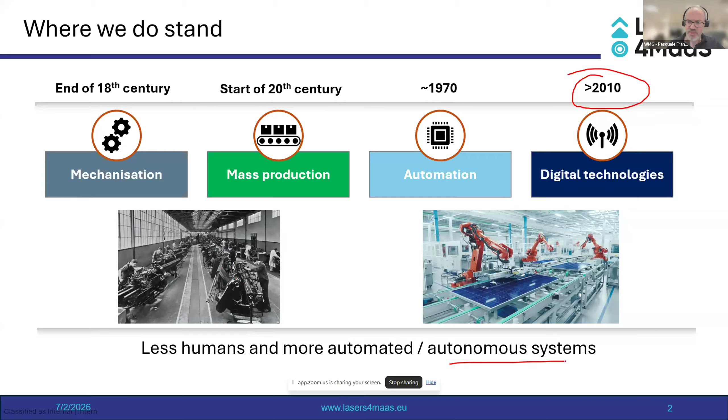Then in 2010 we had a new transition into Industry 4, or the Fourth Industrial Revolution, where we introduced digital technologies within the production systems, together with smart sensors, IoT devices, and AI, with machine learning and other AI technologies. So the trend is really going from manual operations to more automated or even autonomous systems. This is happening these days.

Then we had the idea of introducing a new approach that we call manufacturing as a service. So the question we have is: is manufacturing as a service the next frontier within production systems? We don't know, we will see in the next few years. But our definition of manufacturing as a service is basically to produce on demand customized products with high quality, flexibility, and short lead time. So we have all the main elements: time, quality, cost, with customization, and on demand.

On demand is what's been happening already for a few years. End users want not only one product but customized products depending on specific requirements and expectations. So we want to bring all those elements under the same roof as manufacturing as a service.

Now, to put this in context, we are working within the high-value laser welding industry. So all the technologies we are developing are related to the laser welding industry. Some of the technologies can be exploited outside of the laser welding industry because they are more horizontal, but specifically within Lasers4MaaS, we are focusing on the laser welding industry.

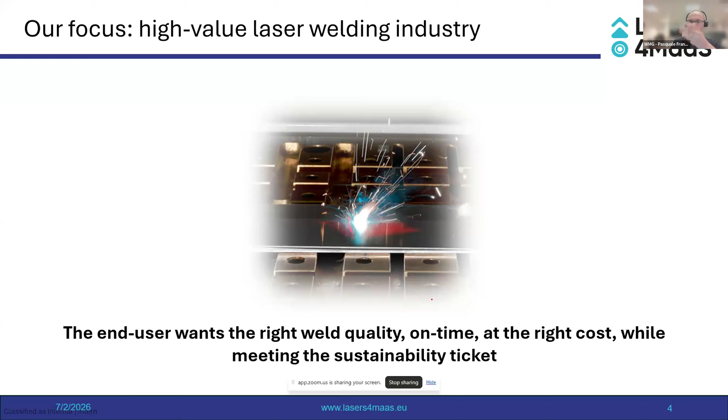Why is that? Because again, the end user wants to get the right quality on time at the right or reasonable cost, and on top of it, we want to meet the sustainability target.

So the current challenges with any laser material processing technology is probably around the cost. Usually they are high capex intense, so there is an acceptance challenge. Controllability - laser technologies are in general not so easy to control because there are many parameters that must be controlled.

Reconfigurability - it's not only about changing power and speed, it's also about the tooling, automation, jigging, welding sequence, and a few other elements of flexibility. And certification - certification is usually very well underplayed, so people are ignoring certification, especially in research environments. But these days, certification is becoming even more crucial.

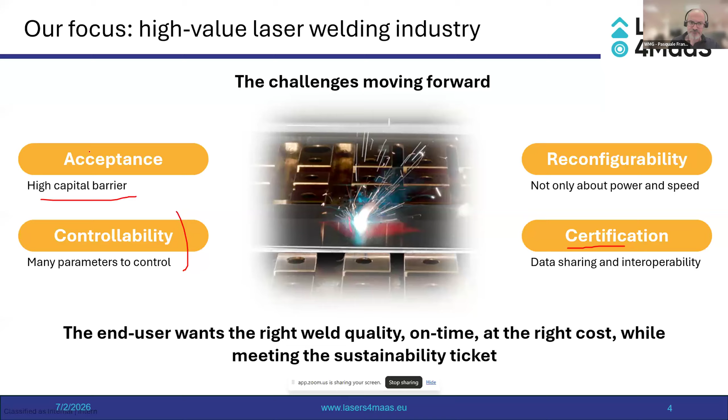Starting from data sharing and interoperability - so those are the four macro grand challenges, and those are exactly the challenges we are trying to address in the project.

So all in all, this is how we are developing the project. We are bridging, let's say, the left-hand side, which is like the classical way of developing laser technologies today - laser production as a tool. So we go through laser to material interaction, laser sources, optics, welding heads, all the metallurgy of the weld, optimization, sensors, and process control. This is like the typical loop we do every day when we develop a new process.

And we want to bridge this laser as a tool with the laser as a service. So we're bringing other ingredients, and we find the synergy between those additional elements. Those elements are about reconfigurability, digital platform, digital services, circularity, sustainability, interoperability, and on top of anything else is the AI-based decision support, which Kim will present just after my introduction slide.

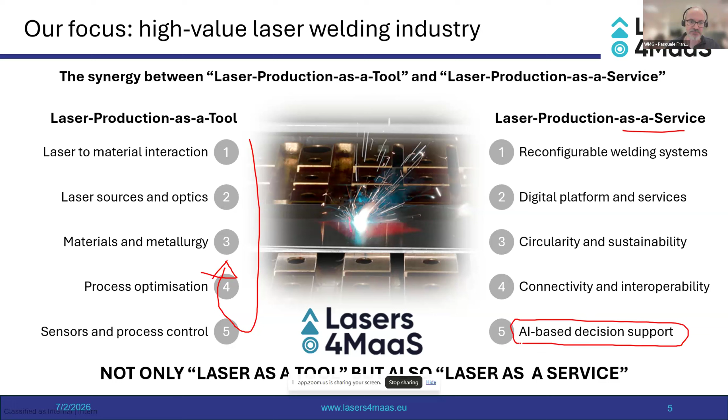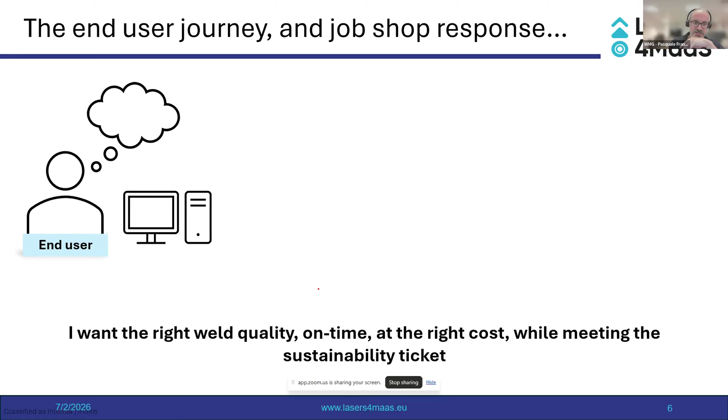So where do we stand with an end user perspective? If you are an end user and you want to use the technology, the first question is, okay, to me is about quality, time, and cost while achieving my sustainability targets. Okay, so we go to the marketplace.

There are different vendors, different suppliers with different capability. I can pick the one which is more relevant to me. And then the job shop manager on the other end will say, okay, great, we got the job, but now I have to optimize the process to deliver the right quality on time at the right cost with right sustainability targets.

So for the people working in the laser welding industry, the first question that is asked is, okay, but what's the laser system that is supposed to be used for the job? What's the clamping? Are we going to use a shielding gas? Are we going to use filler wire? And the list can be very long - beam shaping, wobbling, type of joints, plume management, prep of the sample. How do we assess the quality, testing requirements, maintenance?

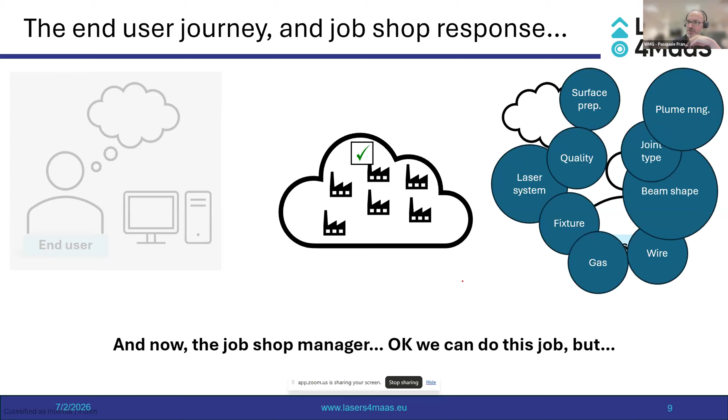This is a very, very dense cloud. This list can be very long, so there is complexity there. And we want to address this complexity in selecting the parameters, selecting the equipment, reconfiguring the system, assisting with the data management, with the monitoring, with the maintenance.

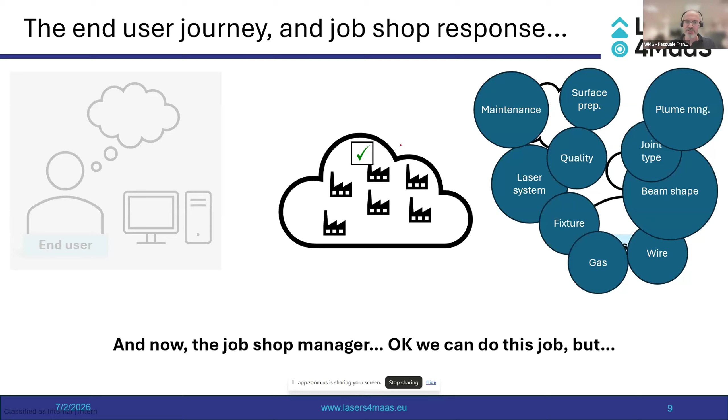And then we have a list of services - the list is quite long, so today we only cover the process optimizer, which Kim will be presenting. And then Christophe from Futurize will be presenting the overall structure, the overall philosophy around the services and the digital platform. And then Yao will be presenting some results about the use of dynamic beam shaping for welding thick sections in the nuclear fusion industry.

And then I will add also some slides in the very end about high-speed welding for battery cooler using dynamic beam shaping.

So the project is a consortium. We have 11 partners distributed between UK and Europe, with Israel as part of it, with Civan Lasers. So we have partners in Italy, France, Germany, Austria, the Netherlands, and the UK - it's a very multinational consortium. We are open to expand our advisory board. We currently have 6 members from different industries, including a couple of end users.

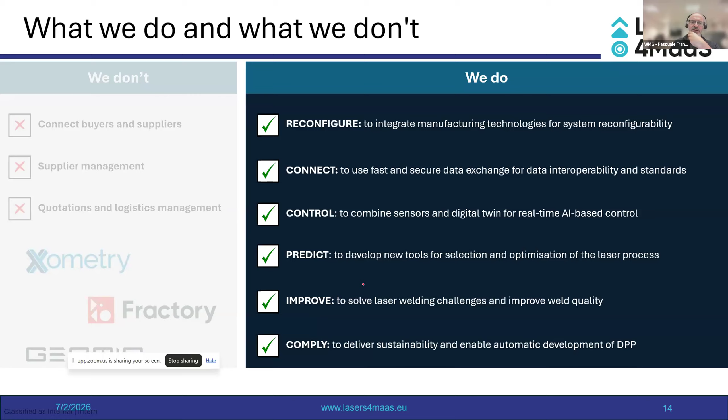But what we do, or at least what we are trying to do, is across those 6 objectives: reconfigure, connect with the digital platform, control using sensors, digital twin and AI-based control systems, predict using high-fidelity modeling and reduced order modeling, improve using dynamic beam shaping to solve challenges in typical welding jobs like high speed welding, thick sections, and dissimilar materials including thin foils.

We are trying to solve well-known challenges using the technologies we are putting together in this project, and then comply - all the certification, including the digital product passport, which for some products, including battery packs, is becoming pretty much policy from the EU. Any battery pack must include the DPP, which is not clear yet what should be included. The project is also contributing to shaping the digital product passport for key products moving forward.

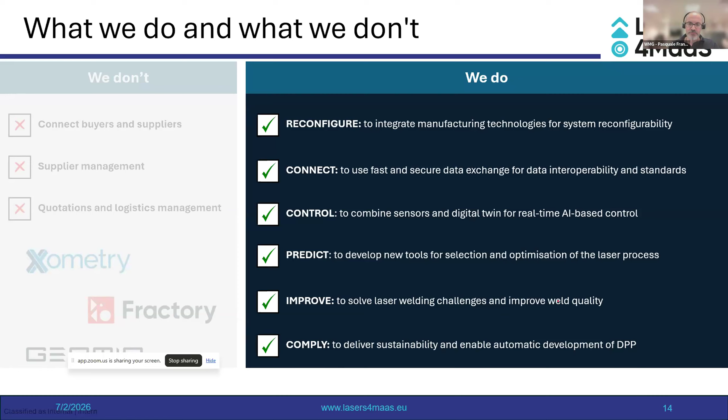Applications and end users are also diversified - you can see the list. We have use cases within automotive, e-mobility like the battery cooler, food packaging, renewable energy and in particular nuclear fusion, which is what Yao will be presenting after me, applications in aerospace, and also applications in the pharma industry. Very diversified. You can see some of the target KPIs, how we want to measure this across the 6 objective areas.

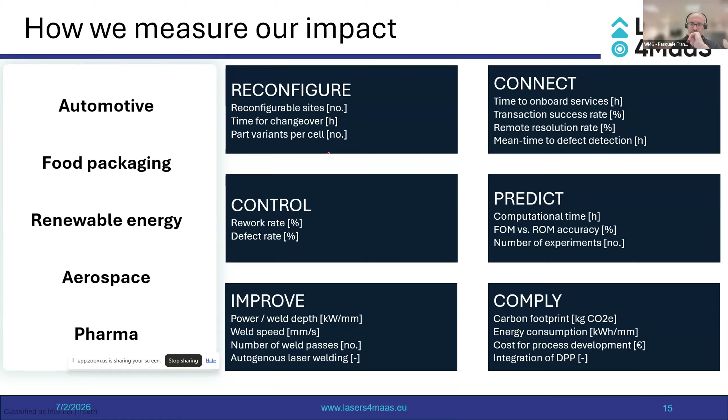Now I want to show you one of those applications in the automotive sector - this is the mock-up of the battery cooler. This is a very interesting application because currently the way this is joined together is brazing in a furnace. As you can expect, being a furnace operation, it's very energy intensive and also a relatively slow process. So that is our benchmark - we want to replace the brazing with the laser welding operation.

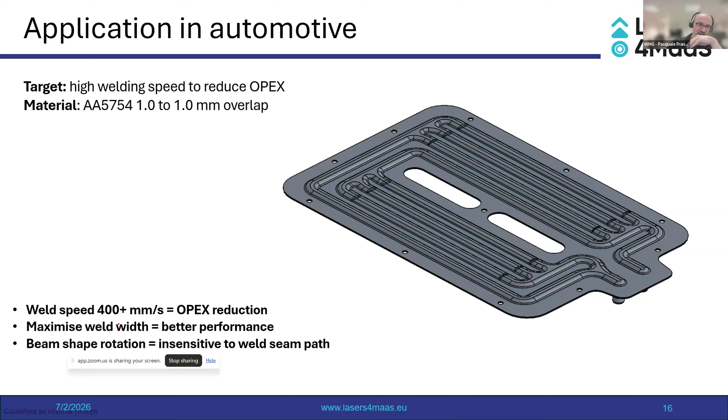In order to meet the cycle time, we have to weld at least 400 millimeters per second as a bare minimum, with a target value of 800 millimeters per second. That's very challenging because with high speed welding on aluminum, when you cross the 200 or even 300 millimeter per second threshold, you start getting this humping profile, which is a defect on its own. You get undercuts, stress concentration, porosity, you lose penetration - basically it's an unstable weld.

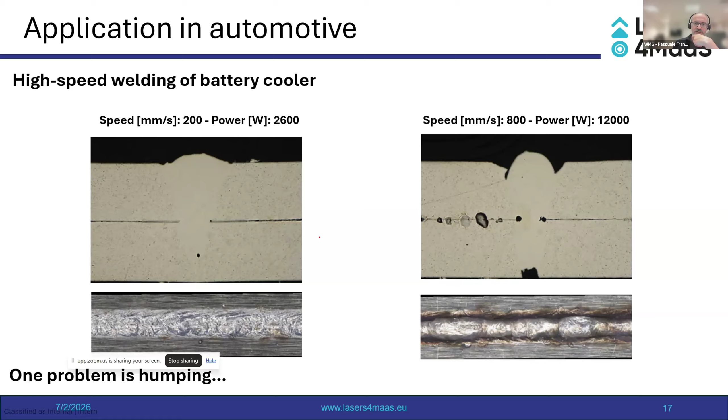That is a problem with this application, and this is where dynamic beam shaping comes into play. We have done extensive testing using different beam shaping profiles. This first one we call the single click profile.

So this shape we call single click - you basically have a central high intensity spot in the center, and then there are 4 small lobes on the sides, which you can see marked on the screen. Because of that, you get a pretty nice weld profile even at 600 millimeters per second. You can literally see from the high-speed video the side lobes making the molten pool a bit wider in the transversal direction, and this helps in reducing the high-speed jet from the molten pool - a pretty stable weld.

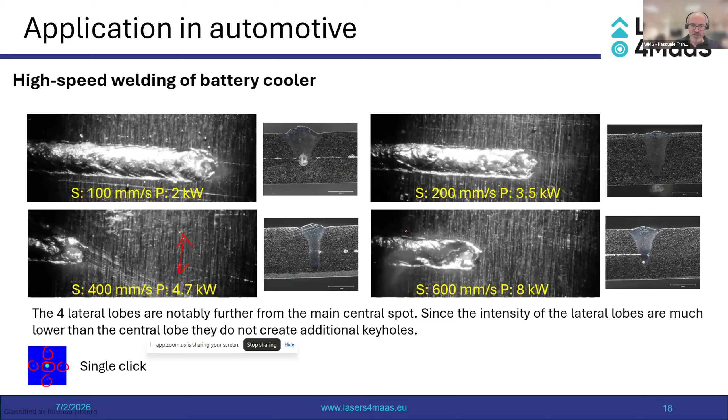Yeah, and this is how it looks like if you start comparing the two cases. The major difference between these two profiles is the way the molten pool is evolving. With a single click, the molten pool is more enlarged in the lateral direction, and the velocity field going backward is reduced.

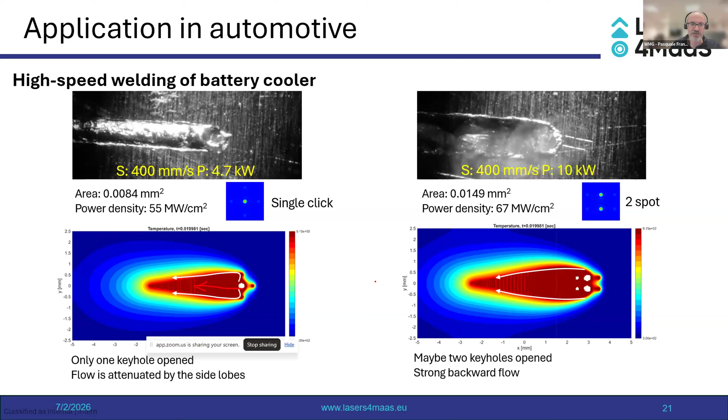So this is helping stabilize the process. With the two spots, that doesn't happen. It's more unstable, more aggressive. There are more backward flow jets, which makes the pool unstable and more prone to humping formation.

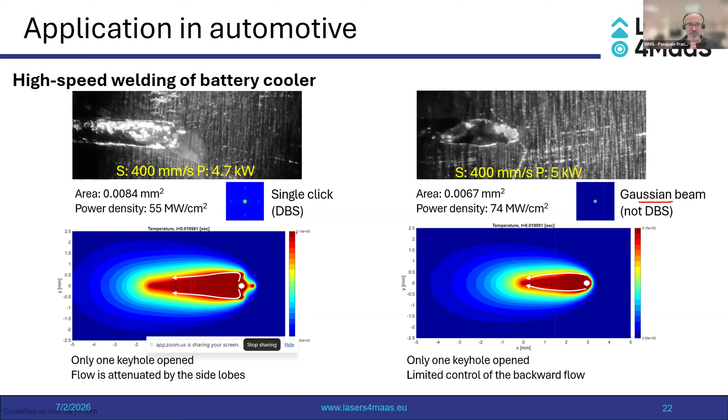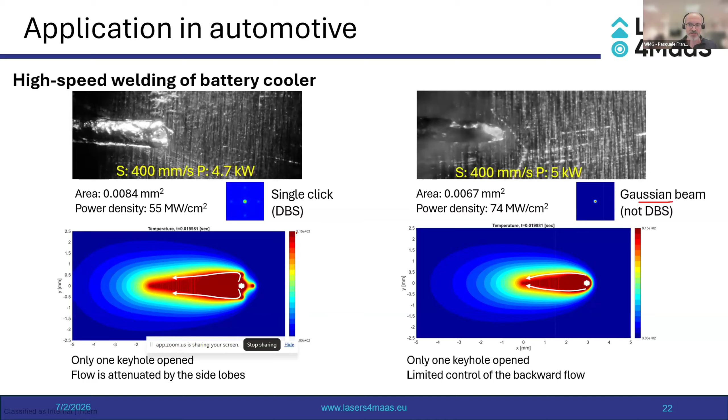So this conclusion is very clear. There is a chance of optimizing the process, optimizing the molten pool, tailoring the molten pool to improve the performance in the end. The fundamental question is, okay, we have all this flexibility, but how do we choose the right beam shape for given manufacturing KPIs? And this is exactly what Kim will be addressing in the next presentation.

Thank you, I hope you see my screen now. We see the screen, yes. Perfectly. So thanks, Antonio, and thanks, Pasquale, for the nice introduction.

I'm here today as a representative of the University of Stuttgart, and together with my colleagues Michael, Volker, and Professor Michalowski, we are currently developing, as Pasquale already mentioned, the process optimizer, the AI-driven decision support in the project. Today I'll give you a small overview of what we've already done.

Let's see if that — no, I actually have to deactivate the laser pointer. Okay, so our understanding of the process optimizer is that it's a digital service that supports the user in identifying suitable combinations of process parameters in order to achieve user-defined KPIs.

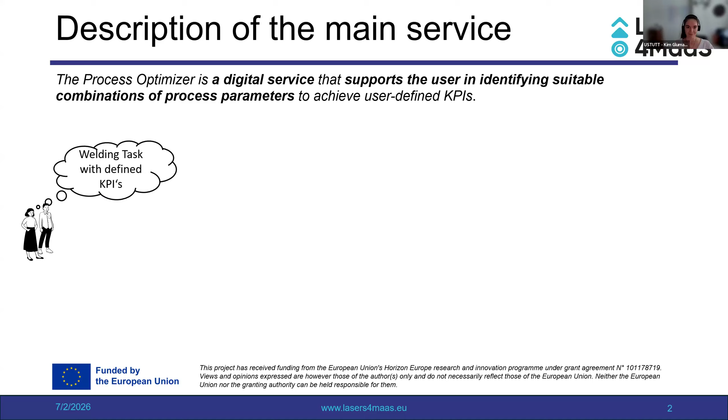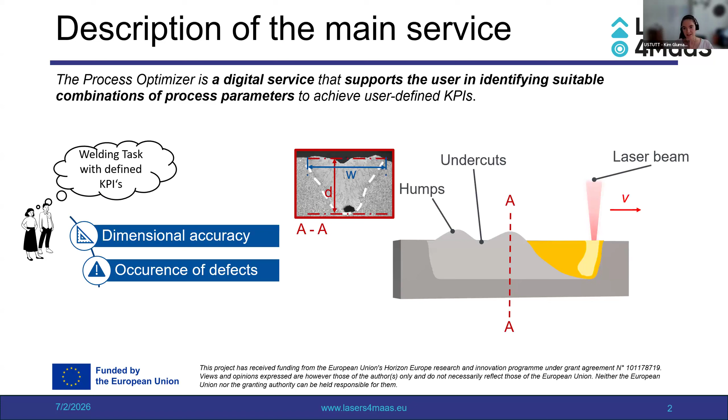Pasquale already mentioned a bit of that in his presentation. So KPIs from the view of, for example, an applications engineer could be higher productivity, less production costs, or even the most relevant one, quality. In terms of laser welding, that could be dimensional accuracy, so depth or width of a weld seam, the occurrence of defects or avoiding them, such as humps, undercuts, cracks, pores, depth fluctuations, or spatter, or something completely different like mechanical integrity or the aesthetic appearance of a weld seam.

And as probably most of you know, we have quite a lot of influencing factors on one hand on the productivity and cost of the weld seam, but of course also on the quality — for example, laser power, welding speed, focus diameter, intensity distribution, and many more. In the Lasers4MaaS project, as Pasquale also said, we are working with dynamic beam shaping, so we add even more parameters to that already large parameter space.

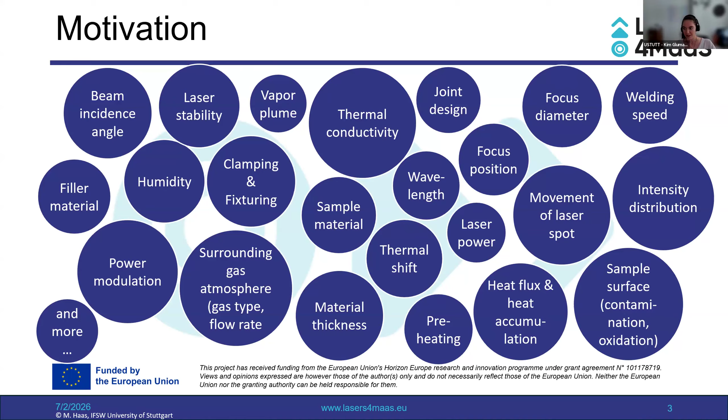Normally we tackle the problem of which parameter to choose in order to obtain the weld seam we want by performing quite a lot of experiments. This is cost and time intensive, and we normally want to reduce the effort. Mostly we do that by prior knowledge.

Either we are already an experienced application engineer with years and tons of experience, having performed thousands of weld seams, knowing exactly how the weld seam behaves depending on the parameters. Or maybe we look into Google Scholar or other publications on what other groups found about process parameters and results. Or we ask colleagues or use simulations. Thereby we can already reduce the effort. I think that's common knowledge.

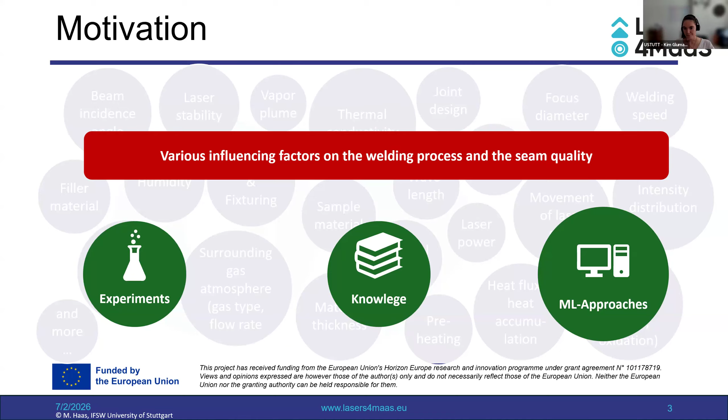In the Lasers4MaaS project, and also lately, machine learning approaches have gained interest in order to reduce process development times and the effort needed to find optimal solutions. So thereby we want to provide optimization as a service for manufacturing.

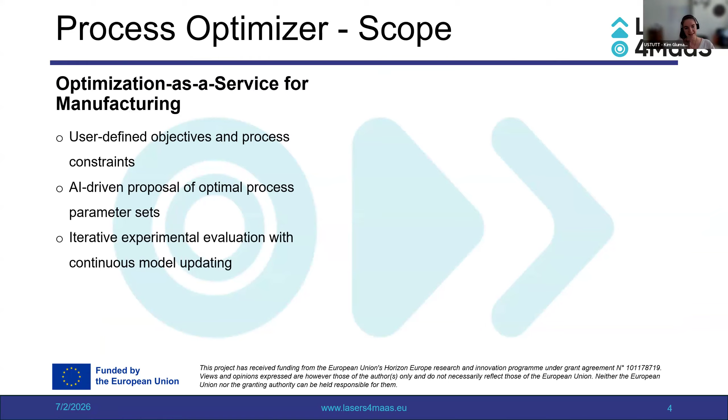We want to include user-defined objectives and process constraints, having the adaptable setup Pasquale mentioned. We want to provide AI-driven proposals of optimal process parameter sets by including iterative and experimental evaluation with continuous model updating.

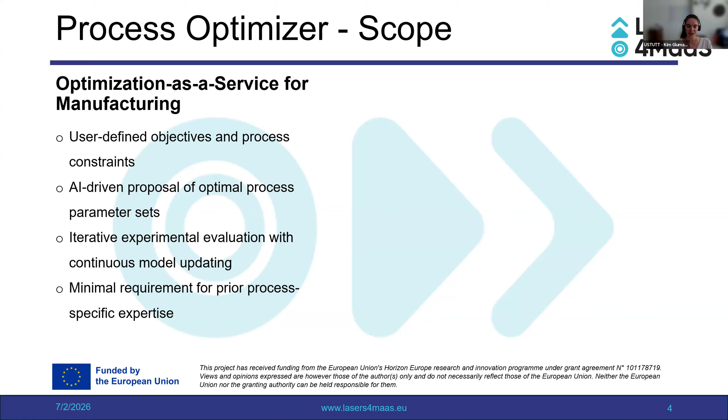And we want to have a system or an optimizer that requires minimal prior process-specific expertise from the user. So if you have prior knowledge, that's good, but it shouldn't be a problem if you do not have any prior knowledge.

The value of manufacturing as a service is that we have rapid and robust process setup, ideally scalable and transferable process knowledge, consistent process performance across jobs, and the ability to adjust parameters easily and fast, thereby reducing trial and error, scrap, and setup effort.

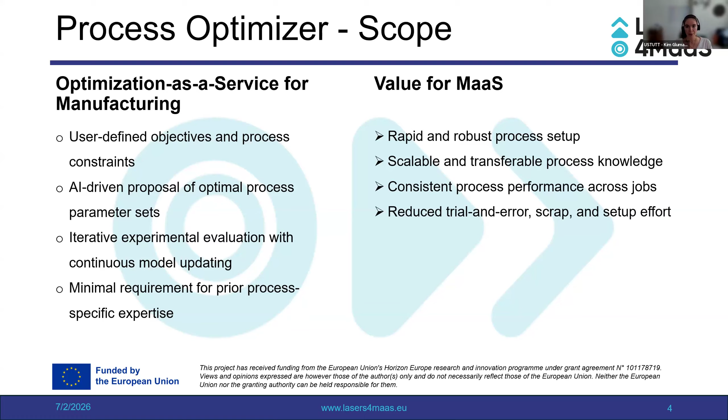All right, so that's about the scope. How do we actually implement that? I'll show you now - we're using Bayesian optimization.

Colleagues of mine, and probably quite a lot of other groups, have demonstrated that surrogate-based optimization, and in particular Bayesian optimization with Gaussian processes, are really good for identifying process parameters to fulfill predefined targets and to efficiently optimize black box processes, where we don't know the exact behavior.

It works really well with low dimensional parameter spaces, so no more than 15 to 20 parameters. The fewer parameters we want to optimize, the fewer experiments we have to do to get suitable results. The really nice thing about Bayesian optimization with Gaussian processes is also that it can handle noisy data, and everyone who works with process monitoring knows how noisy that data can be.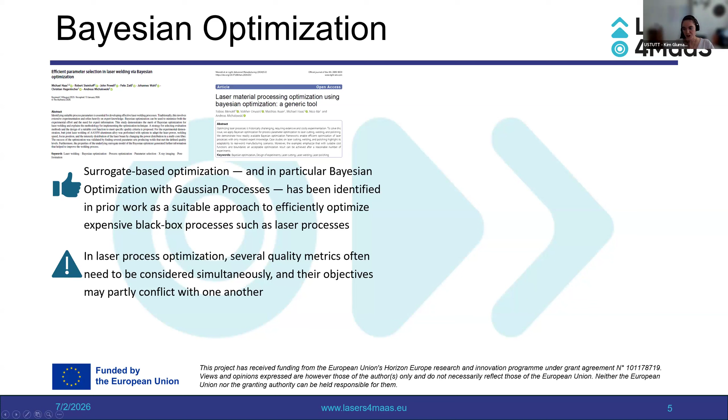One difficulty is that we often have several quality metrics, for example quality and production time, which need to be considered simultaneously, and their objectives may partly conflict with one another. Let's assume that with increasing welding speed, so increasing productivity, quality gets worse since we have more spatter - just an idea. Sometimes the optimization objectives conflict, and that can be a problem for the Bayesian optimizer that we have to take into account.

One approach to tackle that is multi-objective Bayesian optimization. This models several metrics at once - so one model for welding depth, one model for spatter, and so on. Then we can approximate the Pareto front and decide individually which set of parameters gives the best compromise for a certain welding depth, productivity, and least amount of spatter. But this approximation is data expensive, and thereby we lose some of the advantage the Bayesian optimizer normally gives us. That's why most laser processes work by scalarizing the response into one objective, defined prior by the user.

And that's one part of what we are working on in the project - how we can automatically define the objective function. So just to give you a small overview, because not everyone has probably heard about the Bayesian optimizer, let's start with the experiment.

So we performed one or several experiments at the beginning, and then we evaluate that. We have a parameter set X, and we measure the criteria we want to achieve, which should actually be Y. So for example, welding depth and spatter.

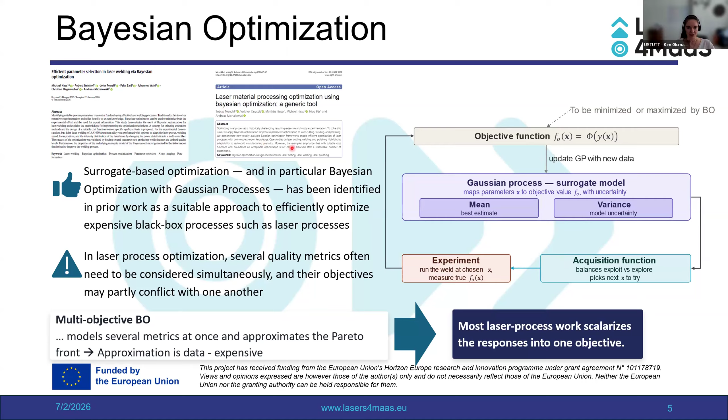So how does this look like in our platform scope? We have the user that interacts with the dashboard, which is developed by Futurice, and Christoph will tell you a little bit about that in a few minutes. Then we have the process selector, developed by the Technical University of Vienna. It's the order-reduced model Pasquale already mentioned, and gives a first estimation of suitable or promising parameter sets. This is returned to the user, who performs experiments, evaluates them, and then has two options.

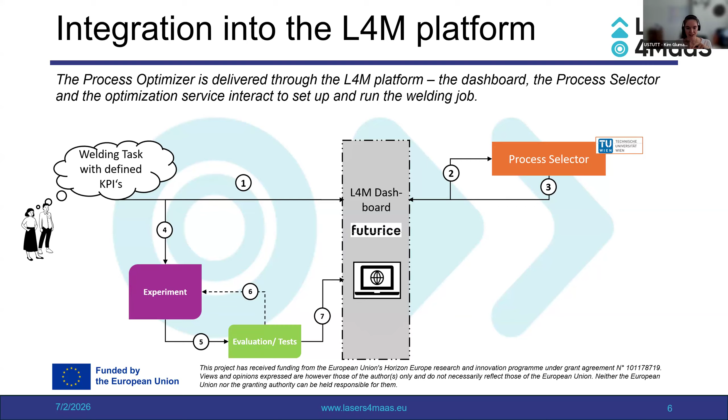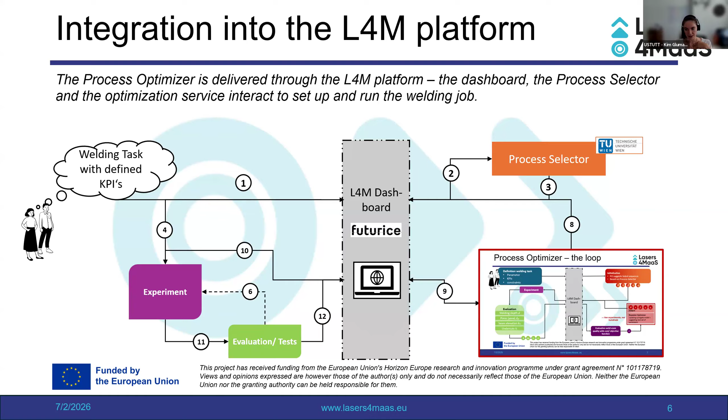Normally, based on these first results, the user can iteratively optimize the experiment himself, so that would be a loop between the experiment and the evaluation. But in terms of our project scope, the idea is to return those evaluation results to the platform, which then leads to the process optimizer loop. The optimizer then suggests the next set of parameters, which is returned to the user. The user performs the experiments, evaluates it, and returns the results to the optimizer, which gets updated, and then the loop starts again.

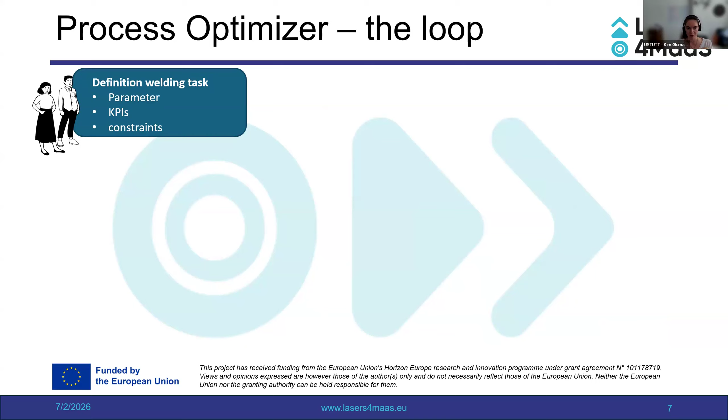Okay, let's zoom a bit into the loop itself. So we have a definition of the welding task, we have a parameter space, we have targets, which are called KPIs in this scope, and we have constraints, maybe a maximum amount of power or whatever. These are user-defined and provided by the platform.

So then we have the initialization I mentioned earlier. We have either a first estimation by a technique called Sobol sequence, or based on the process selector, which gives us a first set of parameters to be tested.

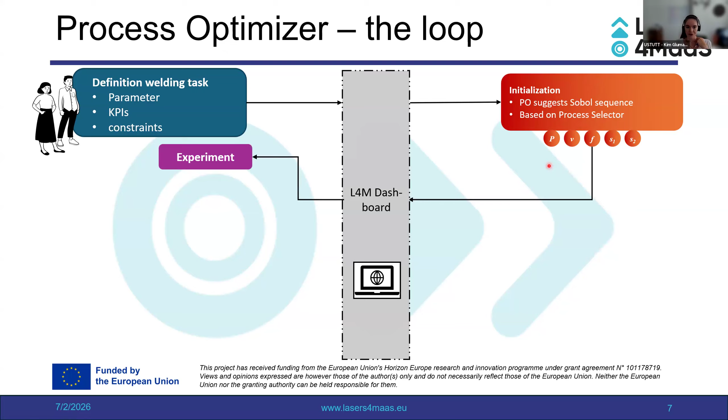The user performs these experiments, evaluates them. In this case we use, for example, welding depth or seam elevation and undercuts, and returns those values to the dashboard. The dashboard feeds them to the optimizer. The optimizer evaluates the weld seam quality with the objective function, then we have the scalar value C, and the Bayesian optimizer then initiates the Gaussian process based on the parameter set and the scalar value, and suggests the next set of parameters. And then it starts again.

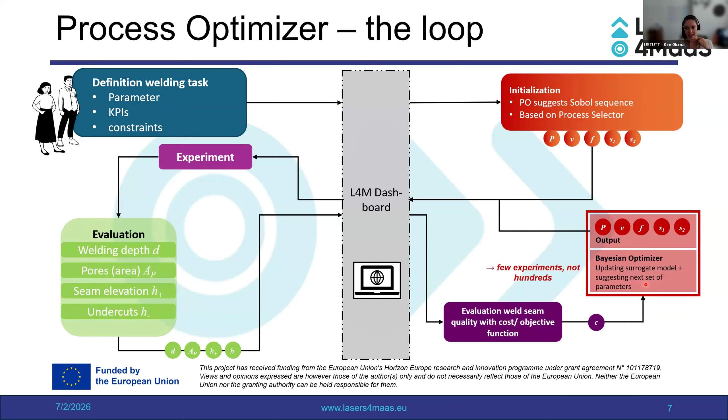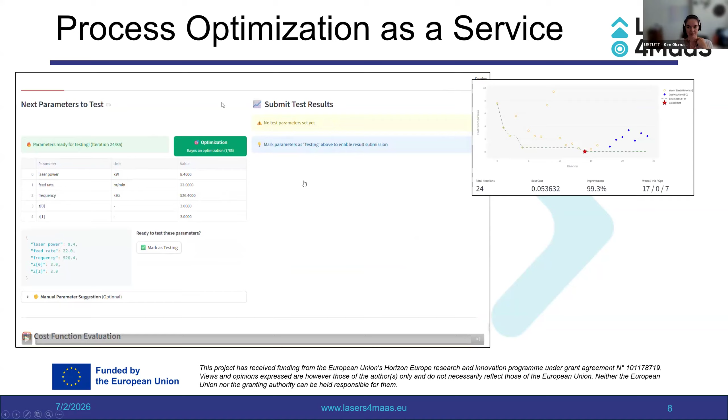So the interaction with the platform and the usability should be quite easy. You can then see, for example, how the individual parameter sets performed and what parameters were tested. So it's quite intuitive, I would say.

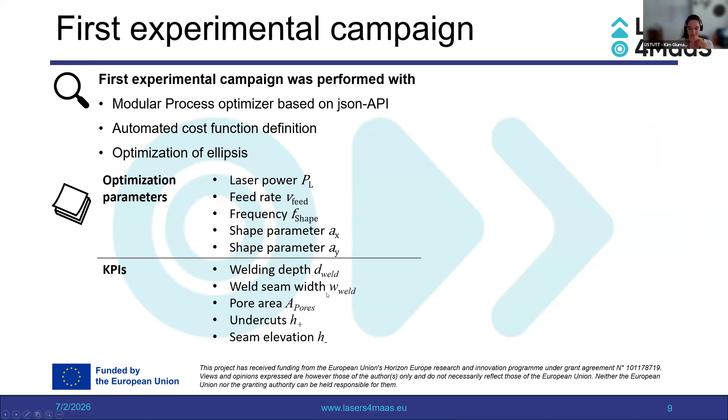And this is just the evaluation result. So we have in the blue colored diagrams the parameter and how they changed. The red ones are the KPIs. The green band is always the tolerance.

Which is tried to achieve, and the green stars are the best parameter combinations we had. Due to time, I will not go further into that. We just tell you that it was successful in our setup. So regarding those values and our targets we wanted to achieve, it was just a demonstration.

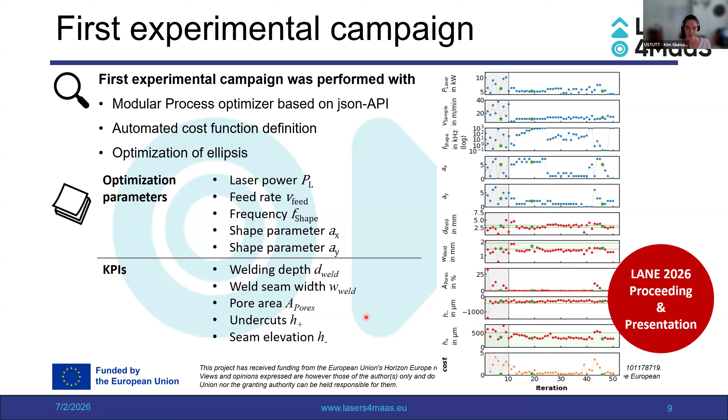And if you're further interested, I will dig a bit deeper into that at the lane. And there will also be a proceeding, so you can keep your eyes and ears open. Yes, and that was the small overview over the process optimizer. Thank you for your attention. If you have questions, yeah, I think we have time for questions. And otherwise, maybe I'll see you at the lane or at the Icaleo.

There I will go a bit deeper into how to include complex beam shapes into Bayesian optimization. Thank you. Thank you very much, Kim. So we have time for questions for Kim.

I can perhaps have a basic question, and it's related with: when the process optimizer selects the best parameters for one task, would this also fit the initial tool developed by TU Wien? So the next time one similar task is requested, would the first parameter suggested be somehow modified because some other experiments were already optimized in the past?

Or is there no connection between this first parameter suggested and the optimizer? There is a connection. So we initialize the process ideally with the reduced-order models from TU Vienna.

So we do not need that many experiments and thereby reduce the amount even more. If due to any reason the process selector service is not available, or it does not fit our targets at all because there are constraints that are not taken into account for the model, for the high fidelity simulation modeling, then we can initialize the process completely without any synthetic or simulated data. But normally we are aiming to reduce the amount of experiments that have to be performed by using those simulations. Did that answer the question?

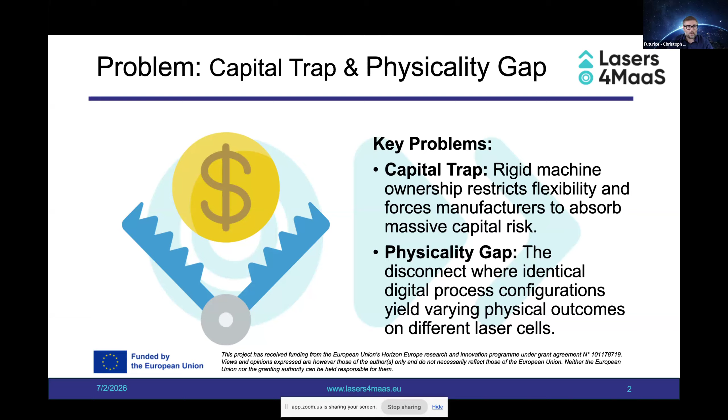When we are looking at this from a strategic perspective, first of all, we're seeing this interoperability and architecture challenge as a three-layer interoperability framework. We needed to understand how to abstract the different parts of the platform, database, and all the surrounding services.

So what we're seeing here is the micro level, the shop floor. We have different kinds of shop floors around Europe or the world for one supplier, for example, and we want to connect them to the meso level, what we call the platform. The platform is, for example, where the optimizer that Kim just presented is being called. This is where we're trying to create the trust between the different parties, between the different laser shop floors. And then we have on top of that the macro level.

That's the digital product passport decision framework in order to fulfill sustainability targets, as Pasquale just mentioned, as a key aspect of our work. We proposed this framework at the latest interoperability conference in Madeira, IESA Madeira 26, where we presented this multi-level framework and are currently continuing to develop it.

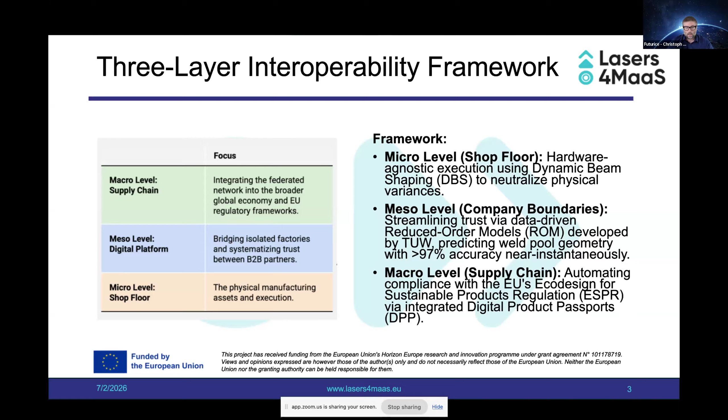So what does it mean from the platform perspective? It's a decoupled platform. The way we think about it, every part of the platform needs to be interoperable. We need to be able to change process selectors, optimizers, and everything that's in there.

So what we have here is a core application that consists of an interface that Kim already mentioned. We also have a platform database that allows us to store data, but also in the way we set it up, it protects IP rights against different competitors. And we are already able to connect to the lasers and the shop floor in order to extract all the data in real time and also push data for processes.

When we're looking especially at the service side, we have the process optimizer that Kim just showed, the process selector, the sustainability and cost evaluator, and the process controller and code generator. We're using all of them from our platform, like Kim just showed. From a platform perspective, we're defining an API schema that we're currently stabilizing in order to be able to have other kinds of services plugged in that do the same thing or different things, so that it's truly interoperable.

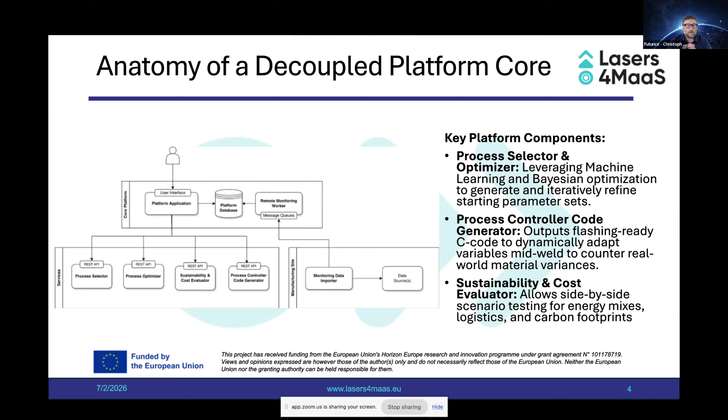The key concepts here are the process selector and the optimizer, leveraging machine learning and Bayesian optimization that we talked about. Then the process controller code generation outputs flashing-ready C code that dynamically adapts variables mid-weld, so we can really take on real-world variances better and adapt fast. And the sustainability and cost evaluator, done by Uni Leiden, allows us to compare between different sites: different energy consumption, different energy mix, and different ways materials are shipped to a site.

When we're talking more about the data side, because a lot of the problems are trust and IP rights—nobody wants to give away their secret sauce—we needed to find a way in the platform to separate that.

So, for example, for the database we're using PostgreSQL. It's a relational schema designed for multi-tenancy, meaning every kind of player, every kind of company, is filtered and protected from each other so that data doesn't leak out and expose their IP. We are ensuring the trade secrets of the IP, and we are trying to ensure this can also move to clients on site as a database.

At the moment we are working still centralistically in order to stabilize the database schema and the APIs, but in the future we will be able to move databases directly to the client while still being able to use a global platform. On the other side is how we ingest the information into the platform.

We're using NATS JetStream telemetry, which allows a lightweight broker to ingest the data from the laser. So you have remote monitoring, you always understand the health of lasers in order to know if you can use a laser and what condition it's in, and also understand the data from a weld to understand quality, react accordingly, and create the digital product passport out of that.

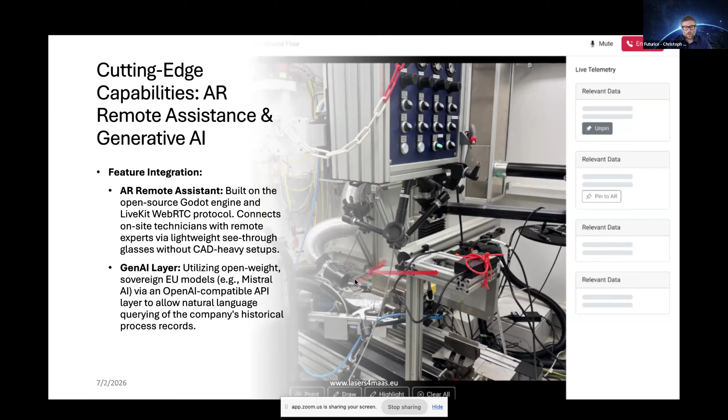And what kind of metrics do we want to create with such a platform? You can see on the side, very easy, minimalistic user interaction with AR technology, really combining the physical and the digital world. We are looking at 4 key KPIs from our perspective.

The onboarding should be fast, so you're quickly part of the network. The transactional success should be 100%. The remote anomaly resolution should be increasing—we're looking at the moment at a baseline of 5%, where we want to increase it above 20%. And the defect detection latency, meaning how fast you can resolve that, should go into sub-seconds, as you saw with all the services we are integrating.

And we need to be candid here: we are also currently in an active development phase. This is why I don't have anything working that I can show, because we're currently integrating all these services into the platform. When this is happening, maybe in the next webinar we can show more of the real interaction between services and the lasers, how this works together, because this is why here it's a little bit more abstract.

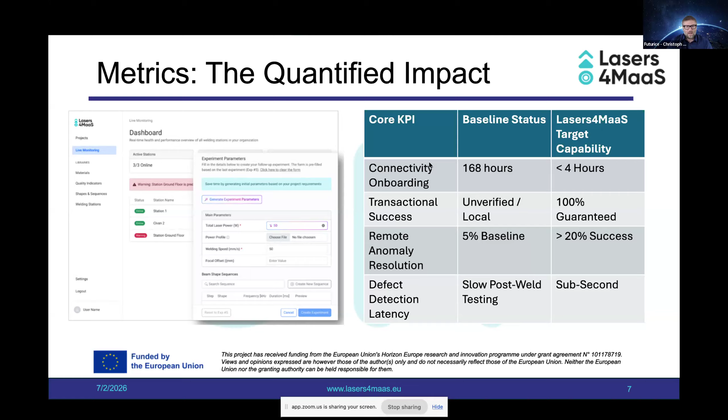But we are also looking at sovereignty, and in this case, true European digital sovereignty. So we decided not to go with the known hyperscalers out of the US. We went with a stack that is completely open source, using Django and Python as a technology stack with React—very much well-known open source technologies. And we are using Scaleway, a French cloud provider, which provides everything we need here.

We are also not locked in to them in any sense, because we're using Kubernetes as a way to move the application from A to B without any big overhead. And we are creating data isolation by design, as I mentioned with the database. So we're really trying to offer sovereignty on the infrastructure and the software application to our clients and consumers, meaning they should be the owner of their data, process, and IP secrets—protecting that is very key for us as well.

So what's the conclusion, the outlook? The roadmap ahead is, like I said, moving away from standalone machine optimization to an industrial grid. If you really have stable processes, how can you move them along a grid? My example is always: let's say it's October in Helsinki, and you produce something there, and you start to have less and less sunlight. How can you move a process to Spain, where there is still more sunlight, dynamically shifting your production?

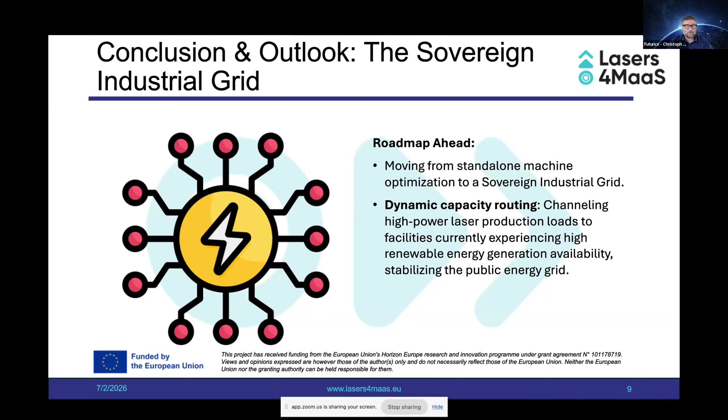And that's a very quick run through the platform, in order to also stay a little bit in the time. Thank you for the attention, and happy to answer any questions.

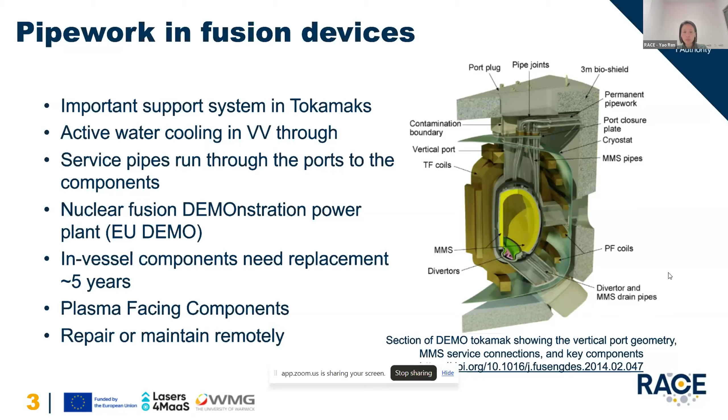When we see these pipe modules, it's really clustered, there's no space to carry out any work from the outside, which requires all the cutting and rewelding to be carried out from the inside. That's why they came up with a solution, developing a laser in-bore welding and cutting tool a few years ago. I will explain a bit more.

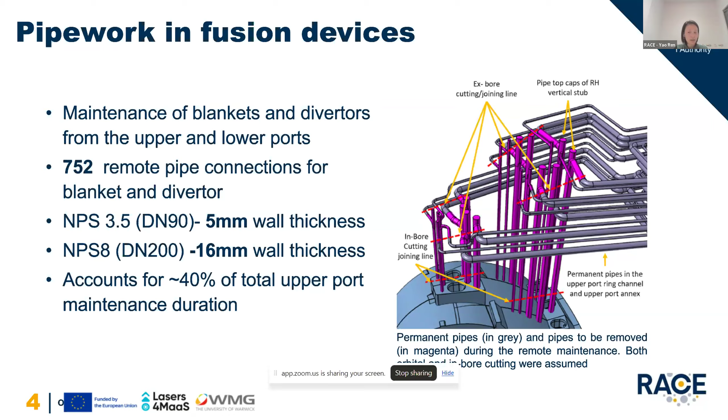So when we look at all the pipes, it actually accounts for 40% of the total upper port maintenance duration. That means during the operation downtime, a quite significant amount of time will focus on pipe cutting and welding activities. For maintaining the tokamak, time and money is quite critical, because regarding the high radiation, any tool or robot or system sent into that environment, if under high radioactivity, might just die quickly. So time is money, and safety is money, everything is money, and we want to do it efficiently, effectively, and economically.

And I'm going to share these two videos. Just have a look.

There is no sound, Yao. I'm not sure if this is the one that you needed the sound for. Oh, there's no sound - we only see the video, not the audio. Do you want me to do it again? It depends if you think it is relevant, you can do it again, if not, we can continue. Yeah, I think let's continue. I can just verbally introduce it.

This is a system my colleague developed a few years back. The idea was to develop this system to actually deploy the welding tool in situ. You could see actually the...

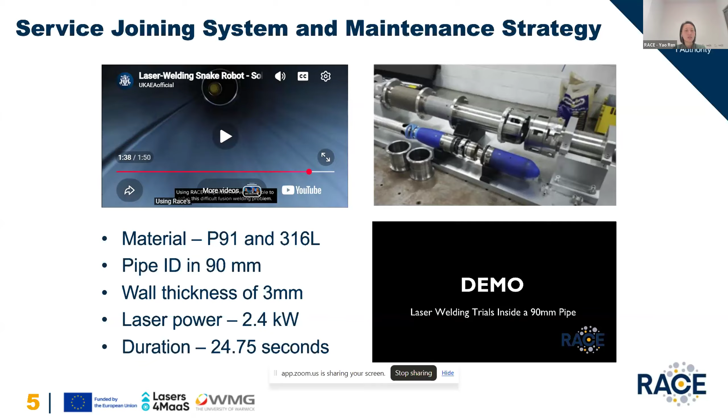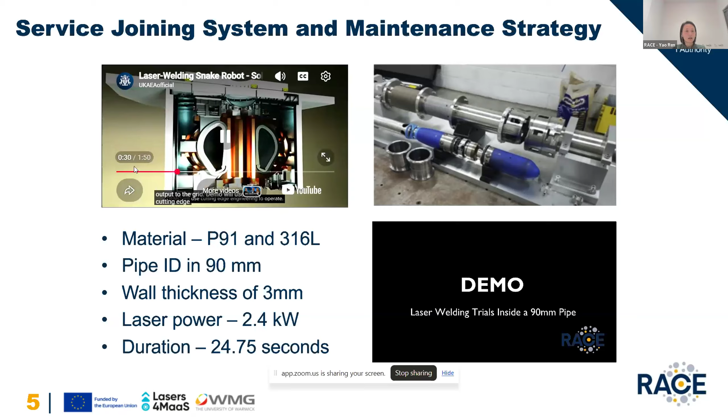Sorry, this is... right, somehow I missed it. We are again... am I stuck at the beginning? Yeah, I'm stuck now.

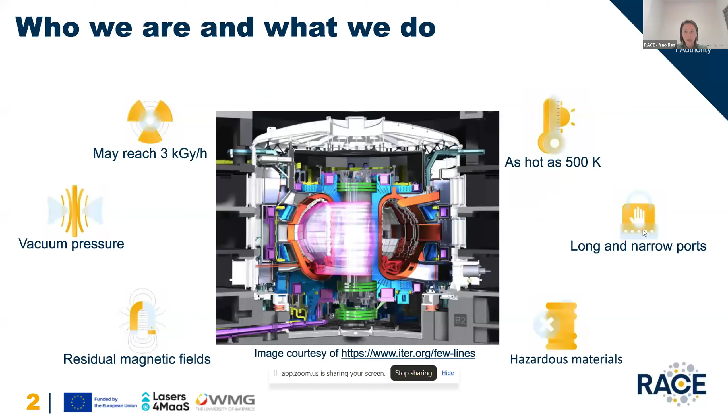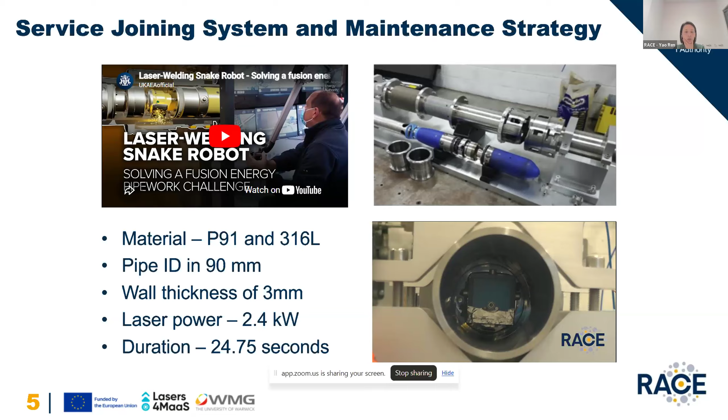Sorry, yeah, I think I just introduced this system, which my colleague developed, and they carried out some feasibility study, mainly focused on thin material because of the power challenge. Compacting everything into a small tool to allow the tool to insert into a pipe with 90 millimeters, the laser power was really limited, up to about 2.4 to 3 kilowatts, and we managed to weld through 3 millimeter wall thickness within about 25 seconds.

However, there were still some challenges. For example, when the power shot up, the bending mirror got actually damaged because of the heat generated, and also there might have been some design issues as well. However, the concept was proved - the process parameter was not really optimized.

On the other hand, we also carried out some other work to test the laser power, to identify how much laser power we're needing to actually penetrate a certain pipe wall thickness. We did some trials at other suppliers' sites, and we actually found out 10 kilowatts also quite struggled to penetrate about 10 millimeters using a multi-mode laser.

If we wanted, we could actually use a combined hybrid solution, which means using laser and TIG together to introduce more heat and produce a multi-pass solution, which could actually make the joint up to 10 or even 20 millimeters. However, this is not the solution we wanted, because considering we want to deploy the system into really confined space, carrying all the packages like the TIG source and laser beam, as well as some filler material, it's very difficult to control the processes.

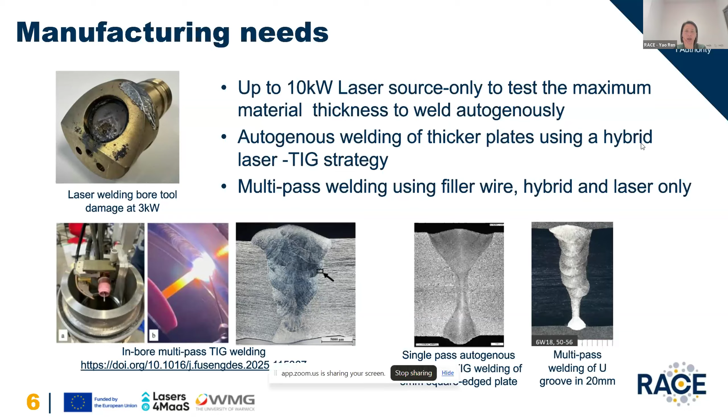It's very challenging to make sure we will achieve the beam quality if we want to operate remotely. So the objective in Lasers4MaaS is using CIVAN laser.

This has the advantage of welding through thick material, but using relatively low power, which we have seen references before. We would like to see if we could actually implement the solution to our thick wall pipe, and if we could actually join it reliably and efficiently.

Further beyond this point, we'd hope to develop an in-bore laser tool for thick section that can potentially weld through using smaller power. That means the challenges on the optic system will be reduced, or let's say the risk of delivering such high power will be reduced.

Another thing is we wanted to develop robust welding process parameters that allow us to repeat the welding in a confined environment without damaging the tool.

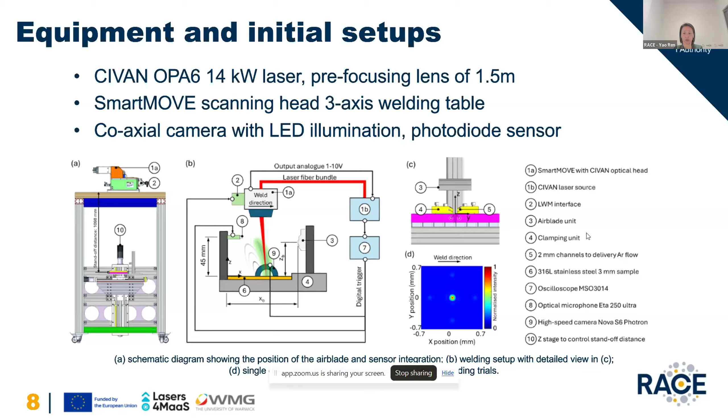So after several trials, this is our final setup used for process parameter development. We have the laser beam set up at a 6-degree inclination angle impinged at the material surface. Here is a tailored shielding gas setup together with the air blade integrated, mounted to the table. During welding, we have the table moving with the laser beam fixed.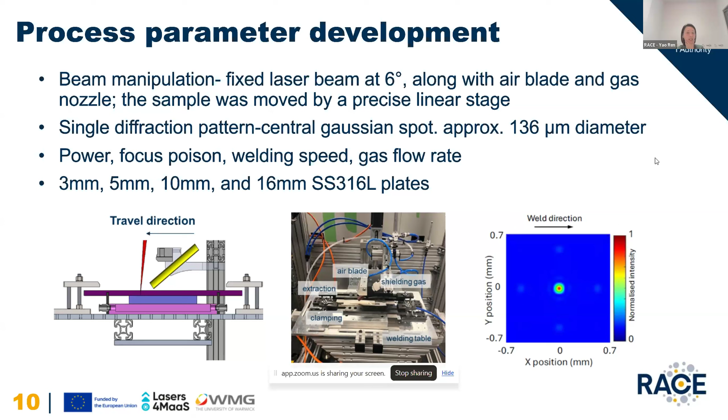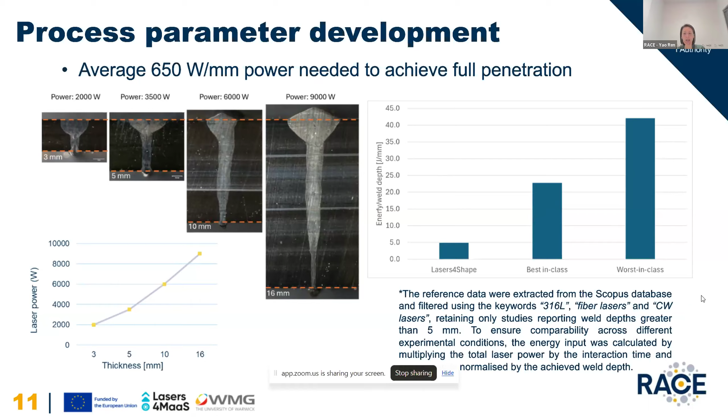We achieved on average about 650 watts per millimeter of penetration, compared to a conventional multi-mode laser, which was potentially about 1 kilowatt per millimeter of penetration. This represents a significant reduction of power, or a significant increase of efficiency. So this is the baseline, and after that we studied the shielding gas influence on materials.

We compared 3 different shielding gases, including argon, nitrogen, and helium, to see if using different gases we could actually achieve the same penetration with less power.

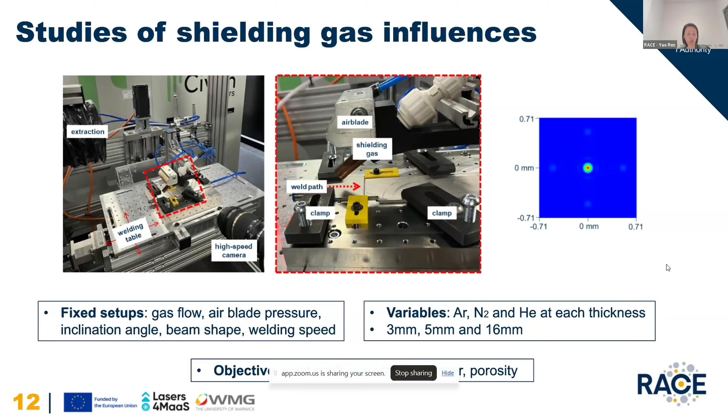On the other hand, we also looked at the spatter generated, the plume generated, and oxidation as well. Another important thing is to study the porosity, and whether any gas type as a shielding gas could give us good quality with less porosity.

So here we'll just share some of the welding profiles. The welding matrix we generated started by assuming a power range based on our knowledge, and we'd like to compare the different gases at different powers to achieve partial penetration towards full penetration, with and without the air blade. The comparison is trying to see whether any impact from the gas gives us a better outcome.

This is a 3 millimeter we tested. We could see some of the pores generated, and some of the cross-sections actually look very clean. We can also compare the penetration depth of each weld.

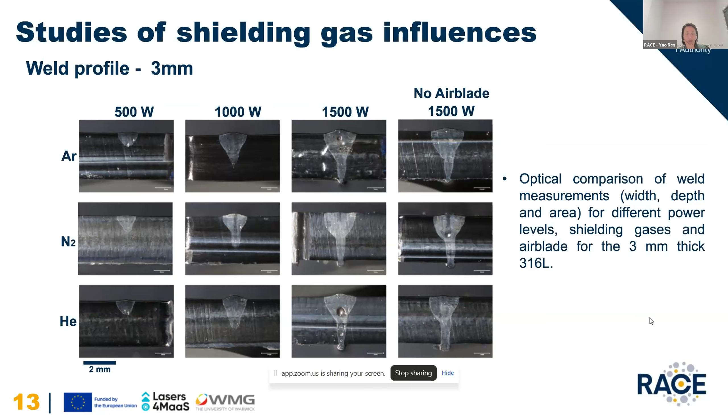This is 5 millimeter as well. Interestingly, we didn't achieve full penetration using the nitrogen gas. However, we achieved it using argon and helium.

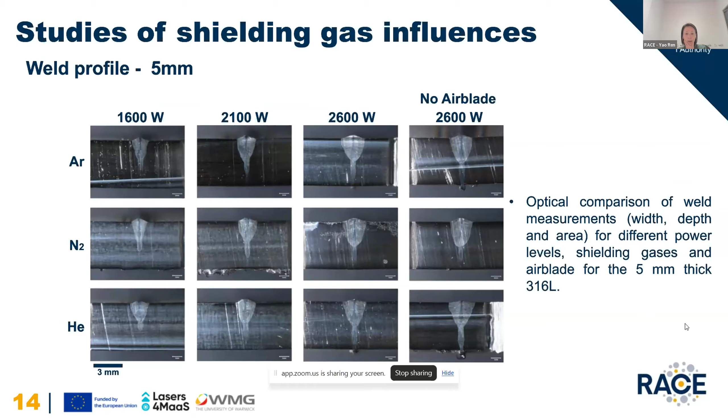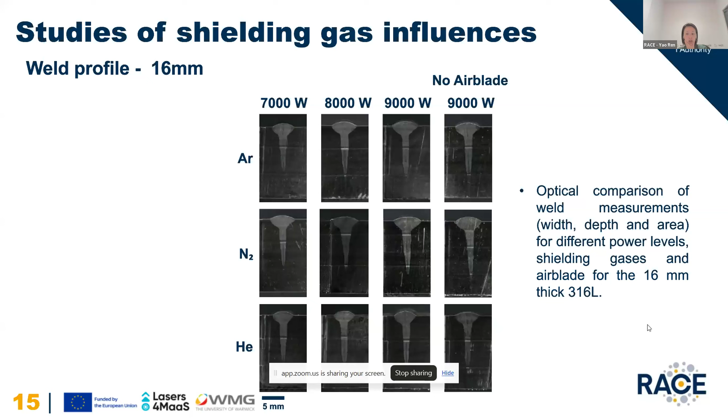And this is a 16 millimeter we have tested, actually at a relatively lower power, even at 8 or 9 kilowatts we achieved full penetration. So this is a graph just showing some comparison of the data we've generated.

Some more generic findings: we found that power increase leads to increased penetration. The relationship actually shows a higher influence on thinner material. You can see that the generation of depth is more steep.

And then we see on the 16 millimeter, basically for helium, it reached full penetration at a fairly low power, 8-9. They will actually generate a similar result.

In a fully penetrated weld, we conclude that air blade had a negligible impact on penetration. I think it's probably just that when we set up, it was just about right, and the power or parameters sort of fell into the sweet spot.

The shielding gas influence is also quite limited within the thinner welds, but becomes more prominent in the thicker section, especially for helium, which provides higher process efficiency. As I already suggested, helium gives better penetration depth compared to the other two gases.

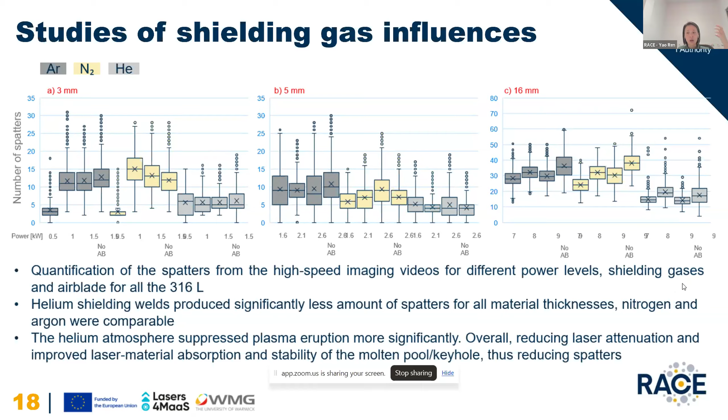We believe this is because the helium atmosphere suppresses plasma eruption more significantly and overall reduces laser attenuation, improving the absorption of energy. Also, as I said before, the penetration shows more effective results using helium because of the low attenuation. This is another analysis that is not fully completed.

We've compared the shielding gas on oxidation generation. Interestingly, we've seen at the 5 millimeter fully penetrated weld, nitrogen gave a little bit higher oxidation, which we don't know the reason for yet. It's being investigated. One hypothesis could be that nitrogen is not fully inert at higher temperature.

Then if it becomes a bit active, probably the performance of the shielding was not as great as suggested. Sorry about this.

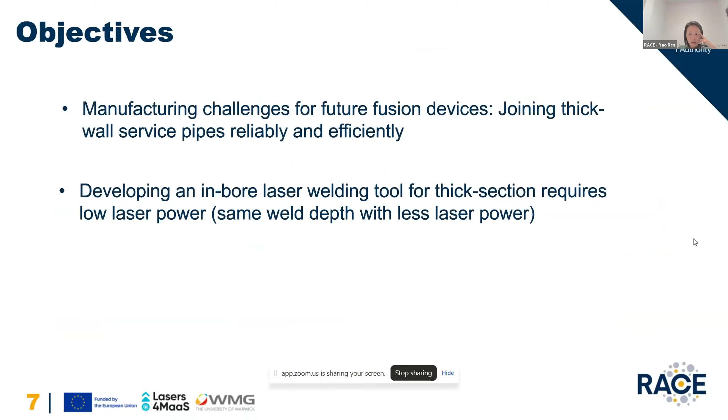I'm sorry, this is not great. That's okay, Yao. Yeah. But it is still unclear if it's welding process parameter related, or if it's actually because of some reason caused by the material manufacturing route, because we did identify some manufacturing route differences.

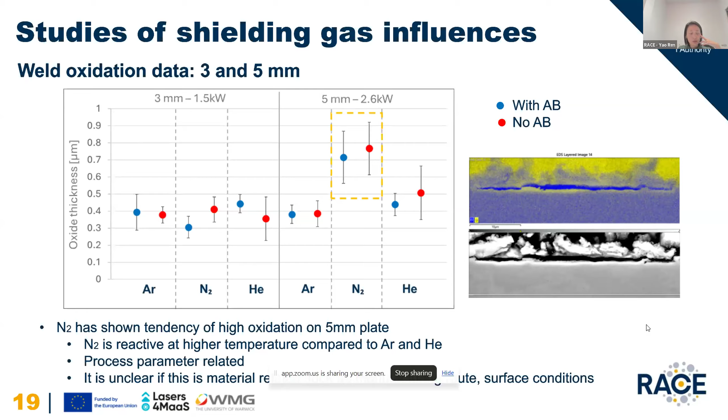of the material were different in the material we sourced. So we're waiting for some results from the 16mm results.

And this is porosity as well. Interestingly, we could see the 3mm material we used at the power that generated full penetration had a lot of porosity detected after the XCT inspection. And on the 5mm it was very clean, regardless of what gas we used.

So we did a bit of investigation because the 3mm material we used was cold rolled, and the 5mm we used was hot rolled. We're still waiting for the XCT result from the lab to review the 16mm result, because the 16mm is also hot rolled.

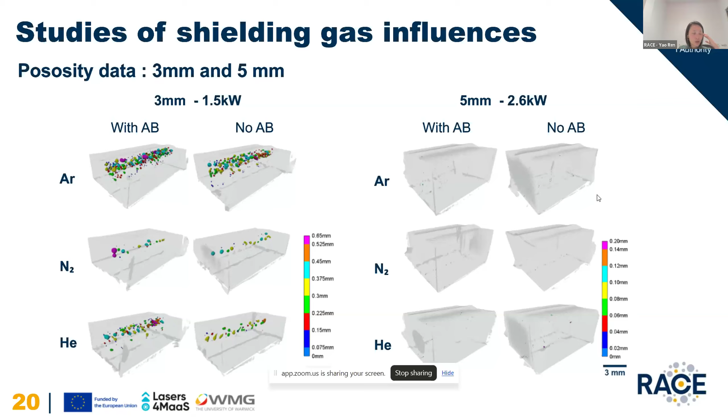The question we had would be whether the manufacturing route actually influenced the generation of porosity, or if it was actually a surface condition issue. So there are still some trials going on in the lab, trying to remove the surface and re-weld using identical parameters on the 3mm just to compare the result.

And yes, some future work. We are going to complete analysis on the 16mm welds, including their oxidation and XCT, and then we will have a better idea to set the direction for the next set of trials.

And some initial feasibility trials, we tested the beam shape. That's definitely on our radar. We need to test it further in the future, because some of the shapes actually bridge the gap nicely.

The gap, I mean, is the fit-up. So considering a remote operation, putting two pieces of material together, probably it won't be ideal. We'd like to see what kind of beam shape and capability of the beam shape could give us the highest tolerance and also generate quality welds. Definitely, that will be the future trials.